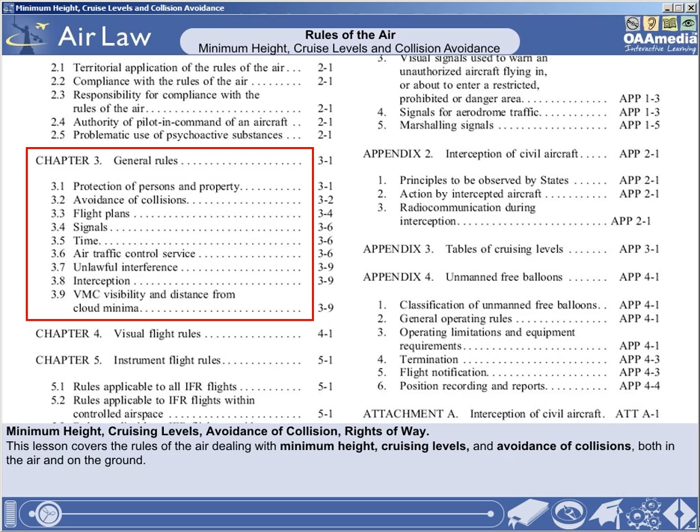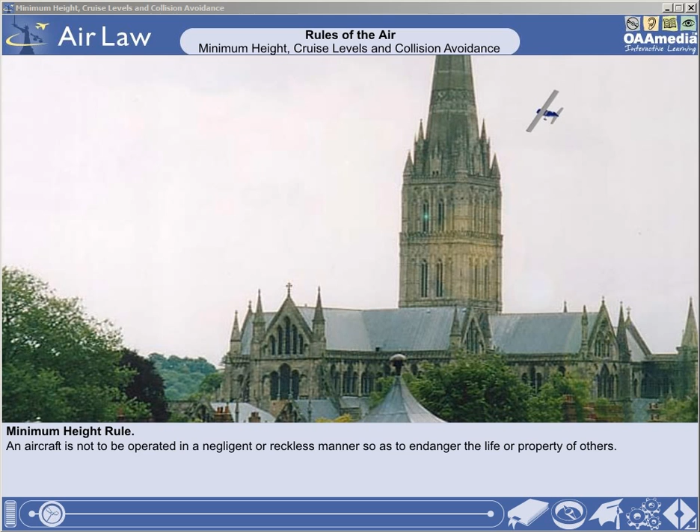The first part of Chapter 3, Annex 2, deals with the protection of persons and property. The key statement here is that an aircraft is not to be operated in a negligent or reckless manner so as to endanger the life or property of others.

One of the central tenets of this rule is that there is a minimum height below which aircraft may not be flown. The ICAO minimum height rule states that, except where necessary for takeoff or landing, or except when express permission is given by the appropriate authority, an aircraft may not be flown over the congested areas of cities, towns, or settlements, or over an open-air gathering of people, unless the aircraft is at such a height that will permit it, in the event of an emergency arising, to make a landing without causing undue hazard to persons and property on the ground.

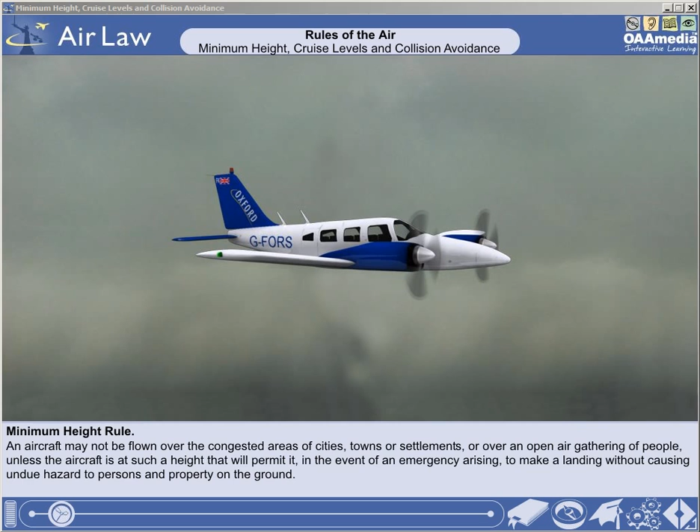This general minimum height rule should not be confused with the minimum specified height rules applied to IFR or VFR flight. You have learnt about minimum heights for VFR and IFR flight in the previous two lessons. But because aircraft are always flying in accordance with either the instrument flight rules or the visual flight rules, you may ask yourself how you reconcile those rules with the general minimum height rule just quoted.

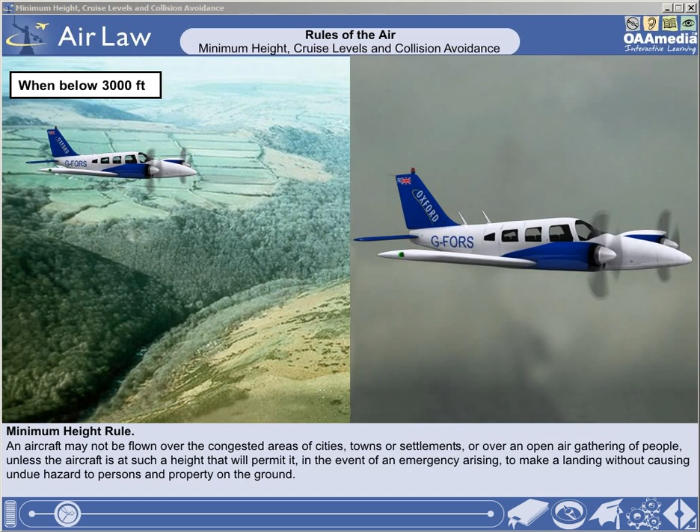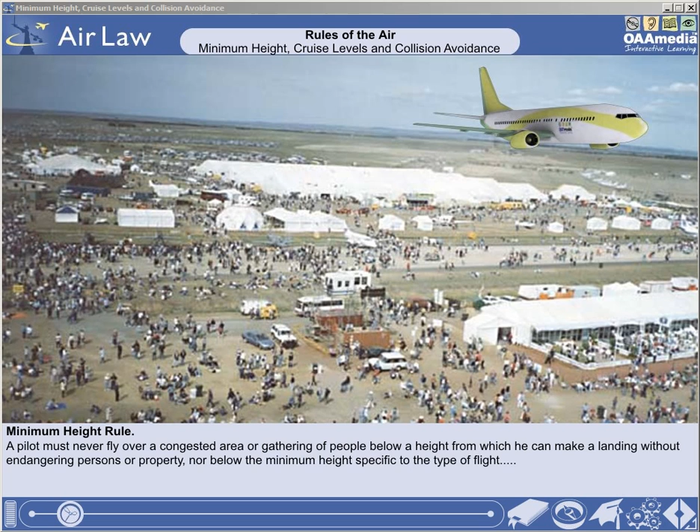The answer is straightforward. The minimum height we can fly is that which satisfies both the general rule and the rules that apply to our type of flight, that is, VFR or IFR, except, of course, for the purpose of takeoff and landing, or with authority permission to do otherwise.

Now let's move on to the question of cruising levels. You should note here that the word level used generally in air law refers to height, altitude, or flight levels. However, in this lesson, we will be talking about either altitudes on the one hand or flight levels on the other.

In order to meet air traffic and flight safety requirements, national aviation authorities establish one or more transition altitudes in the state or states for which they are responsible. At or below the relevant transition altitude, the vertical position of an aircraft in the cruise is monitored and reported by reference to altitude. Altitude is measured with respect to the local sea level pressure setting, which is known throughout the world of aviation as QNH.

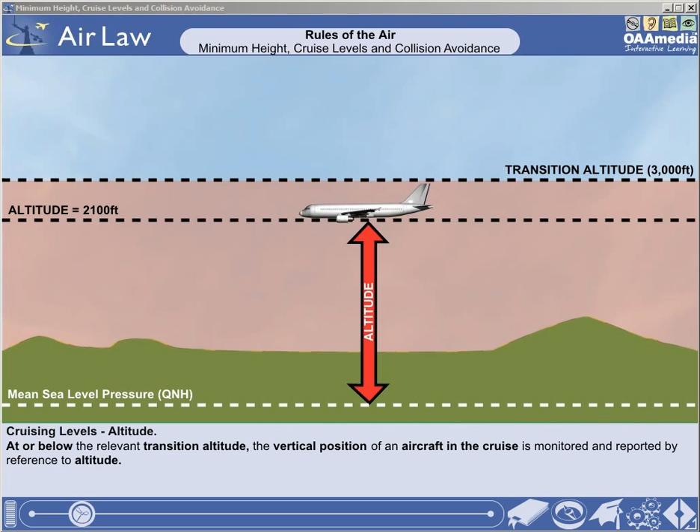Over countries whose topography includes high ground and mountains, the transition altitude will be higher than over a low-lying country. For example, in the United Kingdom, the transition altitude is generally 3,000 feet, with certain exceptions such as around Heathrow and Glasgow. In the United States, though, the transition altitude over most of the country is 18,000 feet, while in New Zealand, the transition altitude is 13,000 feet.

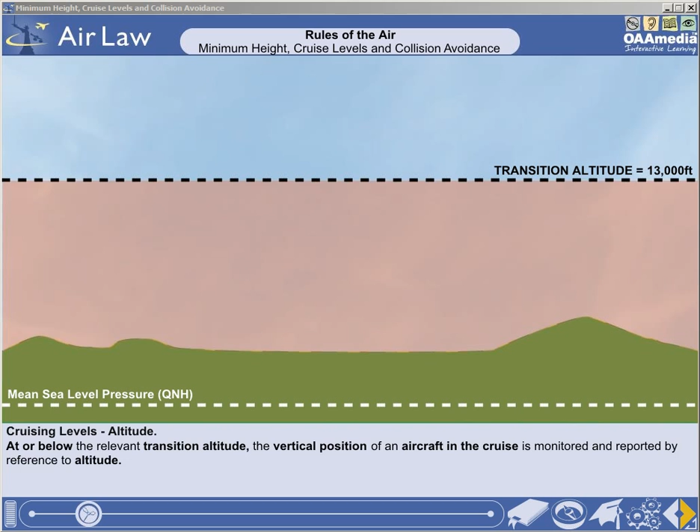Above the relevant transition altitude, the air traffic services monitor and pilots report the vertical cruising position of aircraft by reference to flight levels. Flight levels are measured with respect to a standard pressure setting of 1013.2 hectopascal or millibars. The lowest usable flight level above the transition altitude is called the transition level.

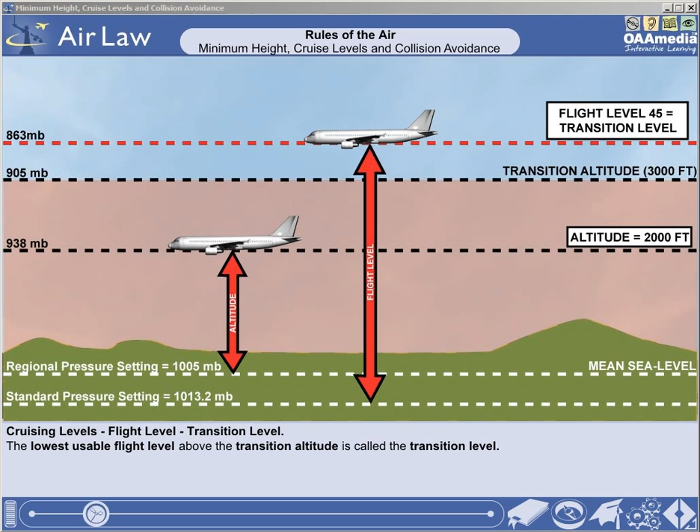You should note that while a transition altitude is set by a national aviation authority, transition levels are not fixed, but change with changing atmospheric pressure. So, on a given day, the transition level might be flight level 45, for instance, as shown here, or, as in this example, flight level 40.

The phenomenon of changing values for the transition level can be awkward to understand. You should take time to study the phenomenon on your own by referring to the lesson on altimetry in the subject of meteorology.

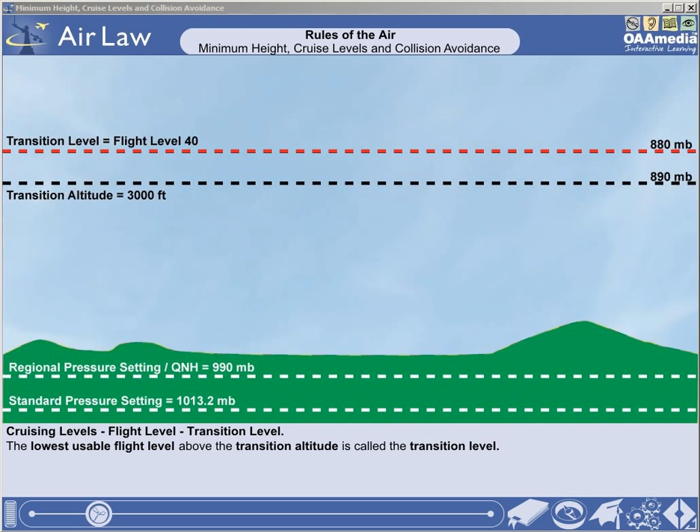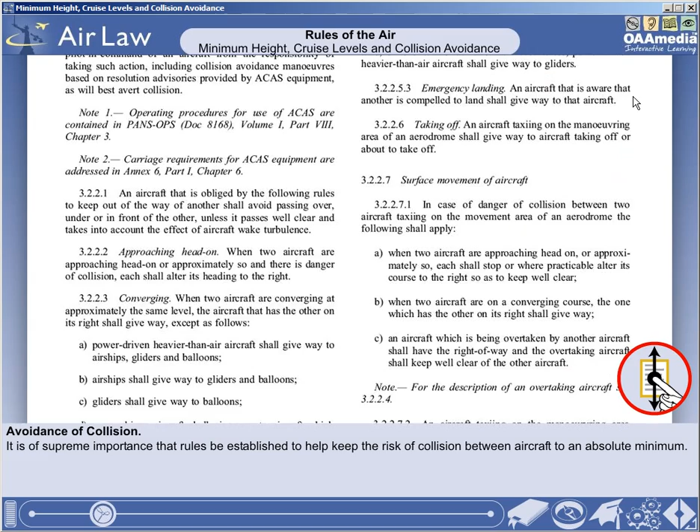Now let's move on to avoidance of collision. In all aircraft operations, it is of supreme importance that rules be established to help keep the risk of collision between aircraft to an absolute minimum, whether the aircraft are in the air or on the ground.

When aircraft are under radar control and flying in accordance with the instrument flight rules, collision avoidance is the responsibility of the air traffic controller as well as that of the pilot. And so the rules of the air on collision avoidance may seem to apply predominantly to aircraft flying in accordance with the visual flight rules.

Nevertheless, collision avoidance rules must be observed and put into practice by all pilots. It is crucial that flight crew never relax their vigilance in seeking to avoid collisions between aircraft in flight, regardless of the type of flight, or of the class of airspace in which the aircraft is operating. Vigilance of flight crew on the ground is also of great importance.

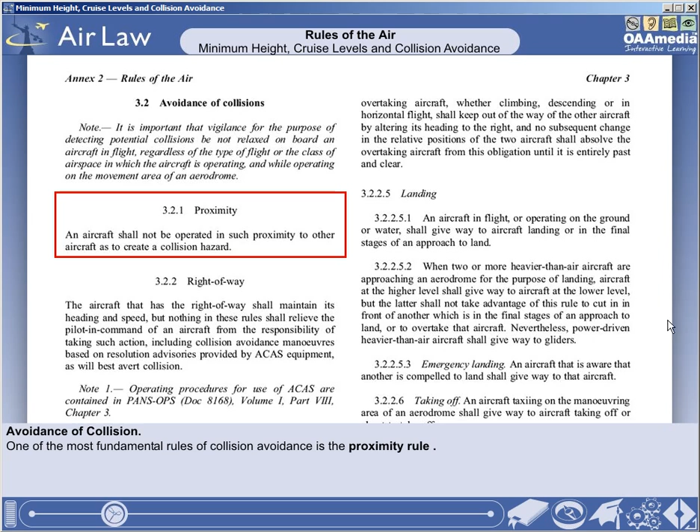One of the most fundamental rules of collision avoidance is the proximity rule. That rule states that an aircraft is not to be operated in such proximity to other aircraft as to create a collision hazard. This, of course, is the reason why aircraft are not to be flown in formation, except by pre-arrangement between the pilots in command of the aircraft taking part in the flight.

If the formation flight is to take place in controlled airspace, the flight must be in accordance with the conditions prescribed by the appropriate air traffic services authorities.

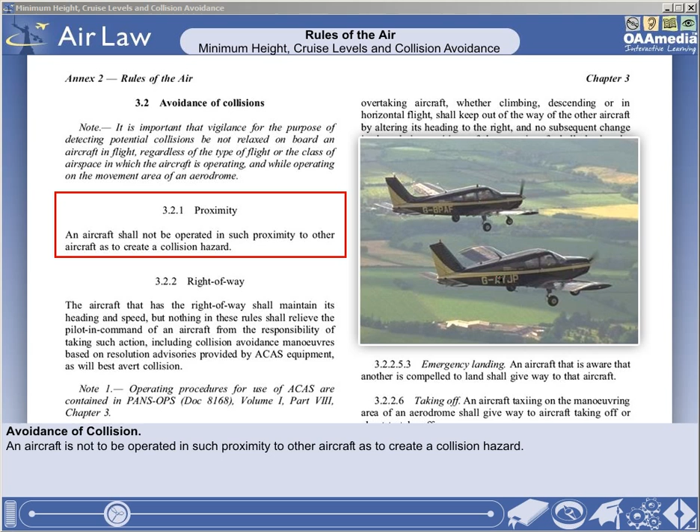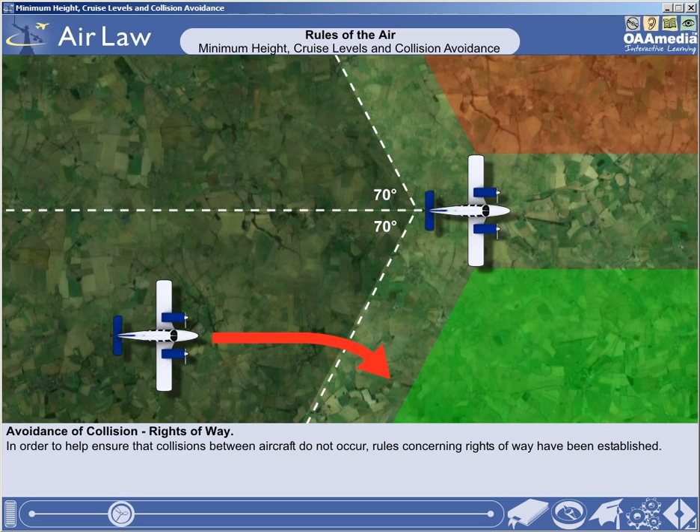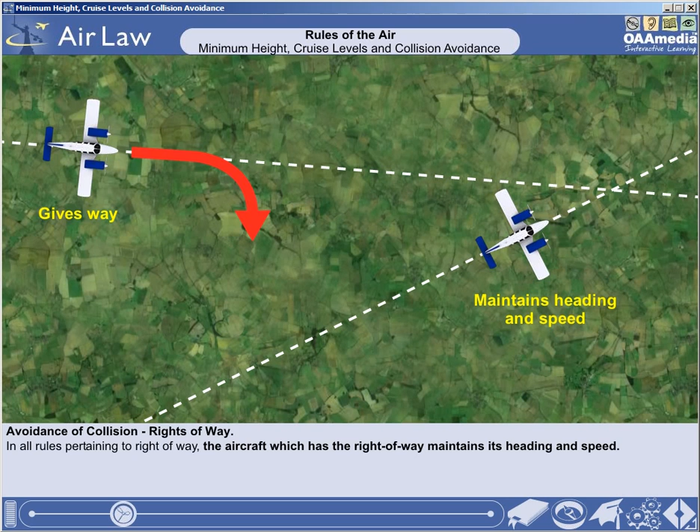It is in order to help ensure that collisions between aircraft do not occur that rules concerning rights of way have been established. In all rules pertaining to right of way, the aircraft which has the right of way maintains its heading and speed. However, it is crucial that pilots understand that no right of way rule relieves the pilot in command of an aircraft having the right of way from the responsibility of taking avoiding action should it prove necessary.

The pilot of the aircraft required to give way may not have seen the other aircraft. It can easily be fatal in the air for a pilot to insist on his priority. It is incumbent on all pilots to take action to avoid collision. This principle includes action to avoid collision based on resolution advisories provided by ACAS equipment, the Airborne Collision Avoidance System, equipment that seeks to warn pilots of the proximity of other aircraft.

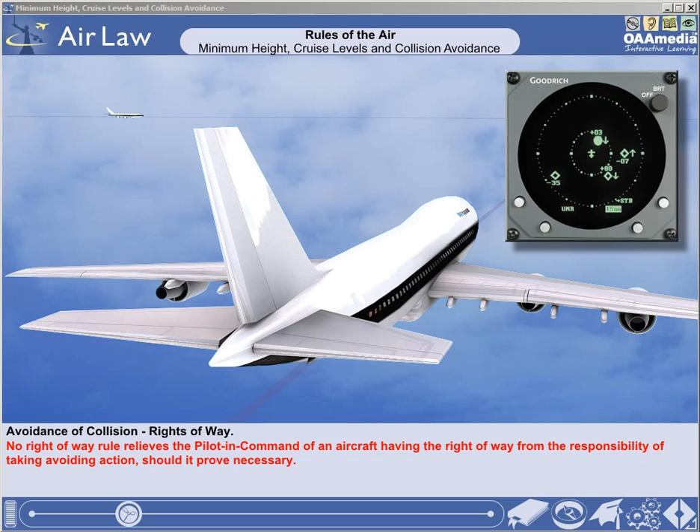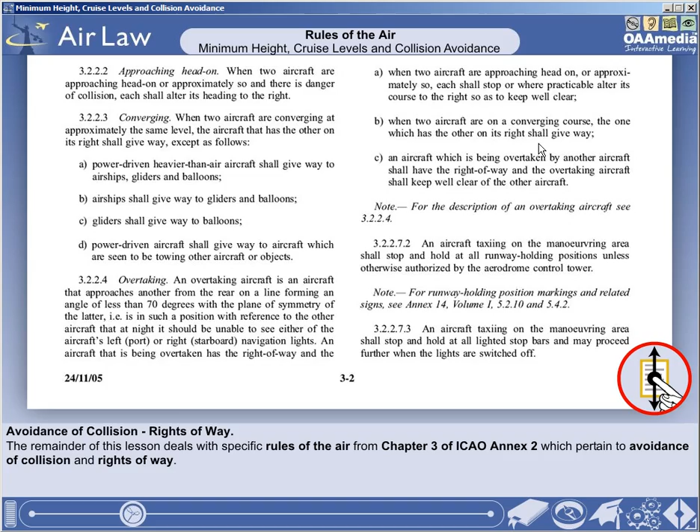The remainder of this lesson deals with specific rules of the air from Chapter 3 of ICAO Annex 2, which pertain to avoidance of collision and rights of way. An aircraft which is obliged by the rules which follow to keep out of the way of another aircraft must avoid passing over, under, or in front of the other aircraft unless passing well clear. Aircraft taking avoiding action must also take into account the effect of wake turbulence.

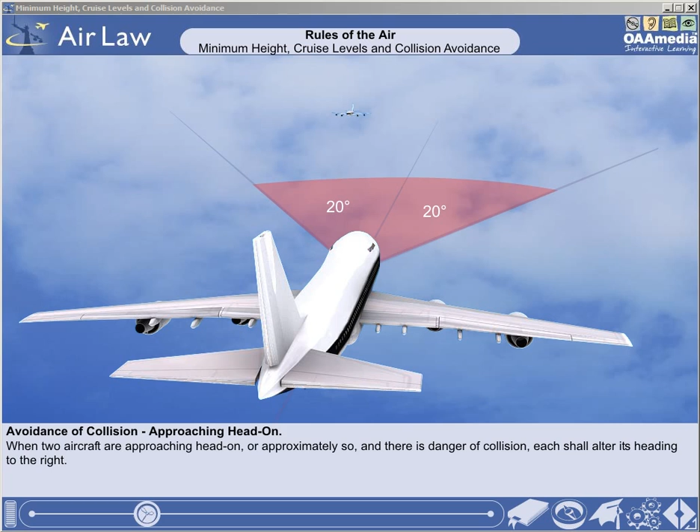If two aircraft are approaching head-on and there is a danger of collision, both aircraft are to alter heading to the right. It is generally accepted that anything within the sector 20 degrees either side of dead ahead is head-on. This is particularly important nowadays as navigation equipment is so accurate that it will place aircraft exactly on the center line of airways. All it takes is an incorrect flight level assignment or poor height keeping, and a head-on situation is much more likely to occur than it used to be.

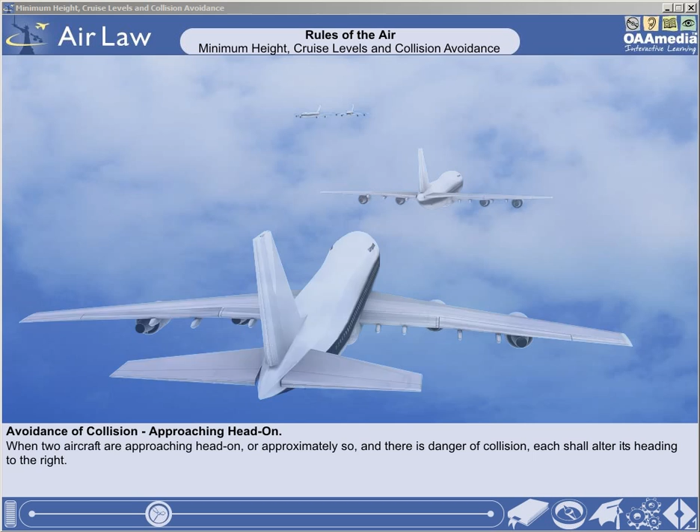When two aircraft of the same category, for instance, two powered heavier-than-air aircraft, are converging at approximately the same level, the aircraft which has the other aircraft on its right is to give way. Expressed simplistically, the aircraft on the right is in the right and should maintain speed and heading.

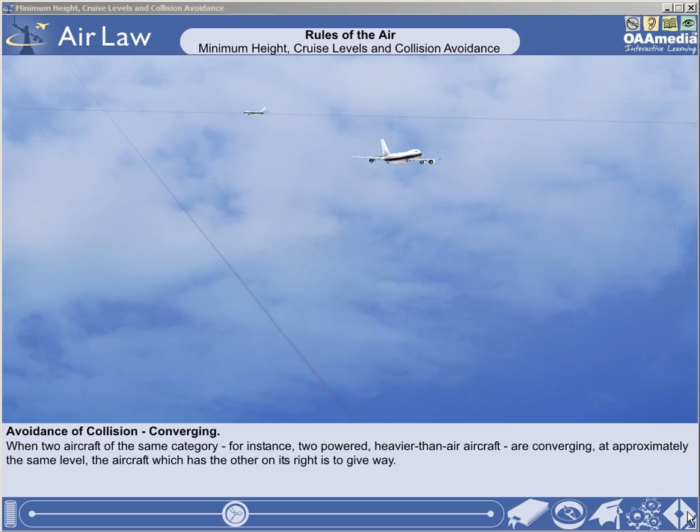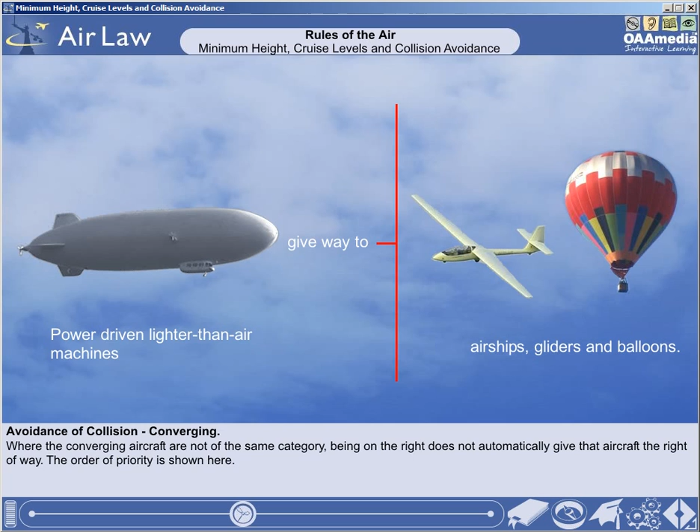Where the converging aircraft are not of the same category, being on the right does not automatically give that aircraft the right of way. In the case of different categories of aircraft, the following right-of-way rules apply. Power-driven, heavier-than-air machines are to give way to airships, balloons, and gliders. Power-driven, lighter-than-air machines, for instance airships, are to give way to gliders and balloons. Gliders are to give way to balloons. Power-driven aircraft are to give way to aircraft which are towing other aircraft or objects.

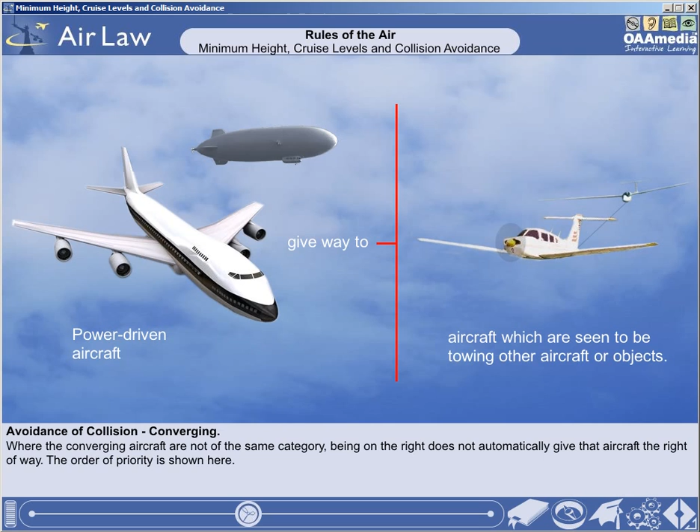Here is a summary of the right-of-way rules in the air when aircraft are converging. Never insist on your right-of-way. Even if you have the right-of-way, always be prepared to take avoiding action yourself if the other aircraft does not.

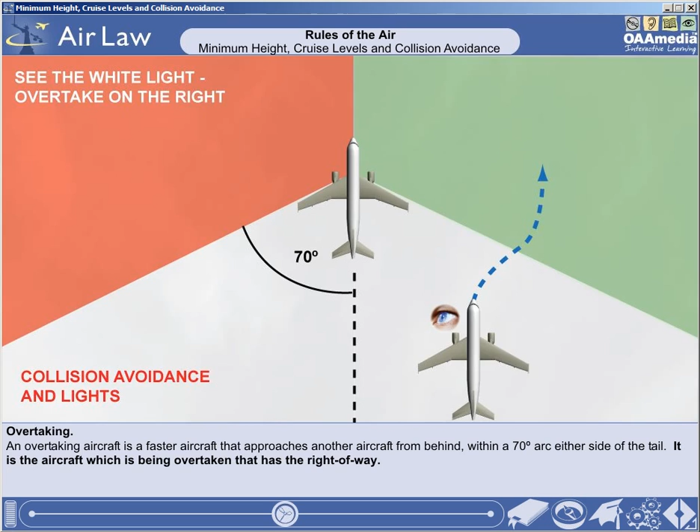Now let's look at the situation of overtaking. An overtaking aircraft is a faster aircraft that approaches another aircraft from behind, within a 70-degree arc either side of the tail of the aircraft being overtaken. At night, the overtaking aircraft in this position would be unable to see either of the other aircraft's port or starboard navigation lights. It is the aircraft which is being overtaken that has the right of way.

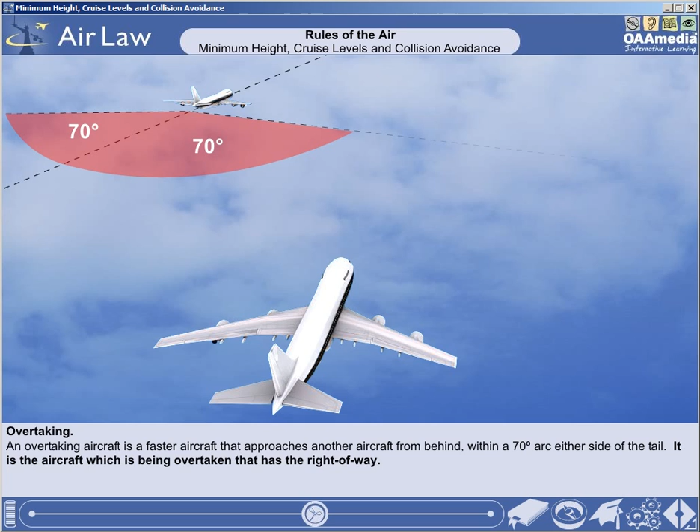The overtaking aircraft, whether climbing, descending, or in horizontal flight, must keep out of the way of the other aircraft by altering its heading to the right. The overtaking aircraft must stay out of the way of the aircraft being overtaken until well clear. Furthermore, the pilot of the overtaking aircraft should take into account the wake turbulence which might possibly affect his own aircraft or the aircraft being overtaken during the overtaking maneuver.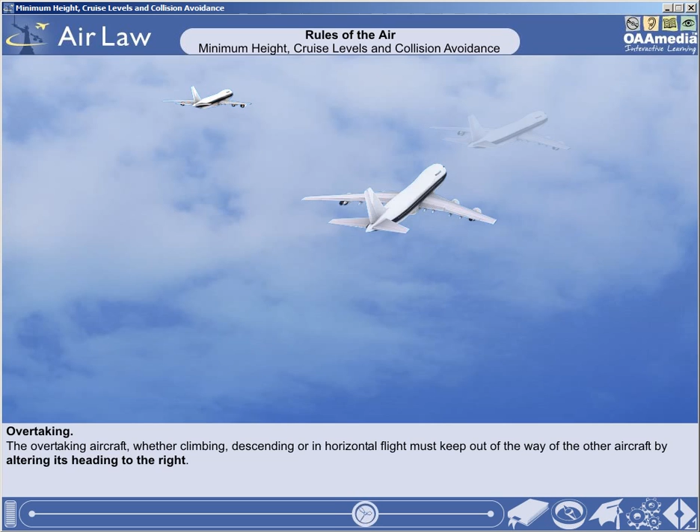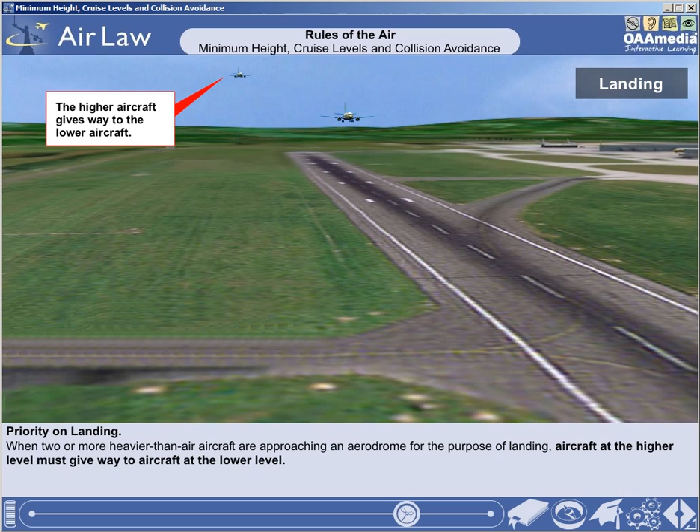Now let's move on to the question of priority on landing. An aircraft in flight or operating on the ground or water is required to give way to aircraft landing or in the final stages of an approach to land. When two or more heavier-than-air aircraft are approaching an aerodrome for the purpose of landing, aircraft at the higher level must give way to aircraft at the lower level.

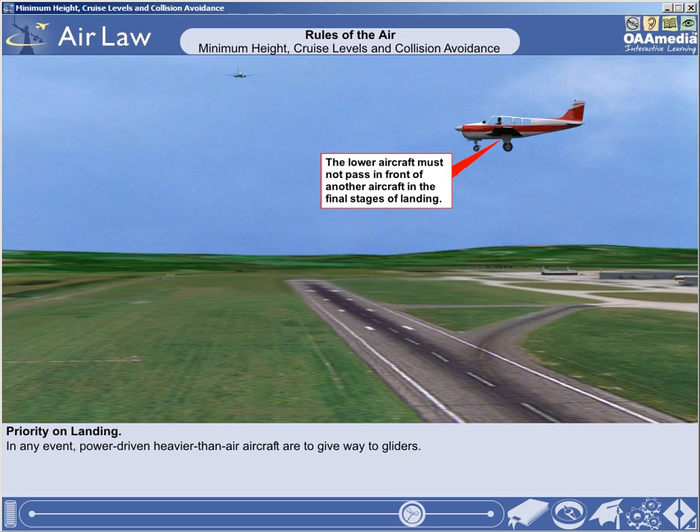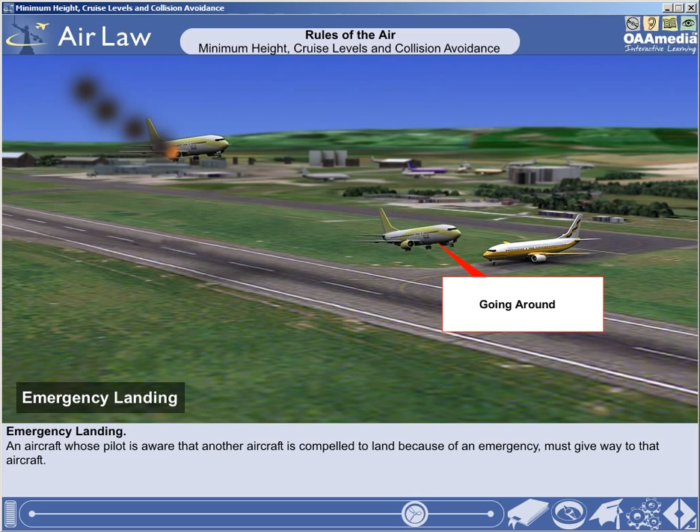But the lower aircraft must not take advantage of this rule to cut in front of another aircraft which is in the final stages of an approach to land, or to overtake that aircraft. In any event, power-driven, heavier-than-air aircraft are to give way to gliders. An aircraft whose pilot is aware that another aircraft is compelled to land because of an emergency must give way to that aircraft.

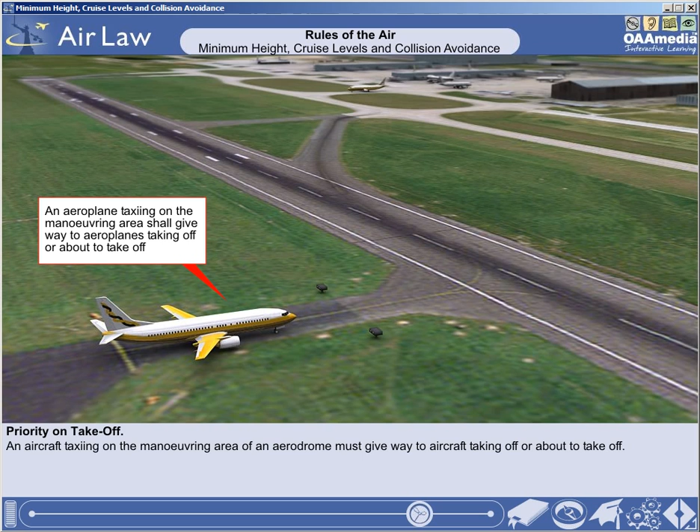Let's pass now to the issue of priority on takeoff. An aircraft taxiing on the maneuvering area of an aerodrome must give way to aircraft taking off or about to take off.

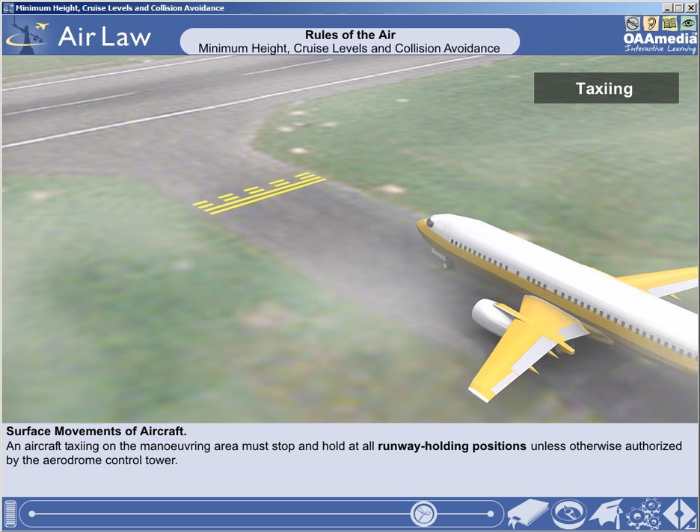Chapter 3 also contains rules governing the surface movement of aircraft. An aircraft taxiing on the maneuvering area must stop and hold at all runway holding positions, unless otherwise authorized by the aerodrome control tower. Likewise, an aircraft taxiing on the maneuvering area must stop and hold at all lighted stop bars, such as those shown here at a taxiway intersection. The aircraft may proceed further only when the lights are switched off.

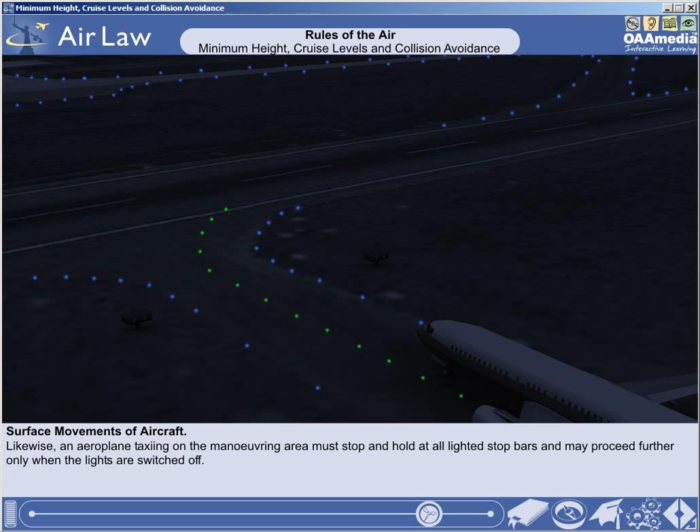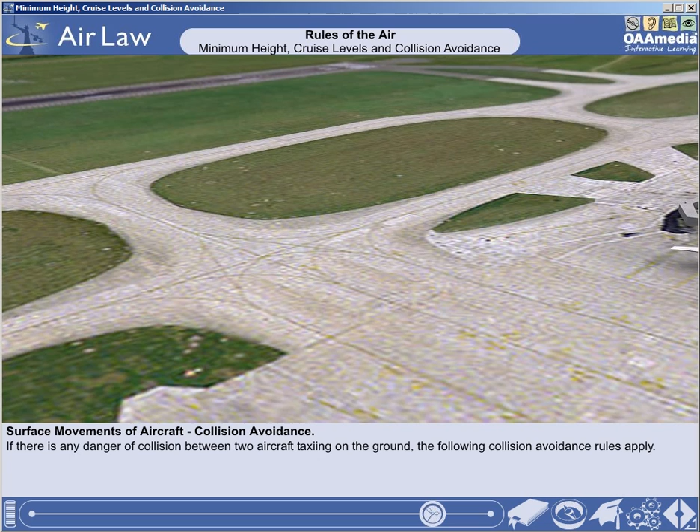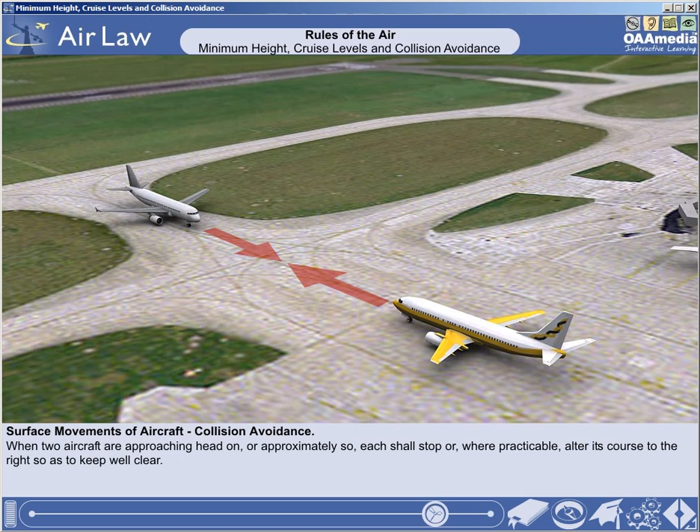If there is any danger of collision between two aircraft taxiing, the following collision avoidance rules apply. When two aircraft are approaching head-on, or approximately so, each aircraft must stop or, where practicable, alter its course to the right, so as to keep well clear. When two aircraft which are taxiing are converging, the one which has the other on its right must give way.

Any aircraft which is being overtaken by another aircraft has the right of way. The overtaking aircraft must keep well clear of the aircraft being overtaken. That completes the lesson on minimum height, cruising levels, and avoidance of collisions.